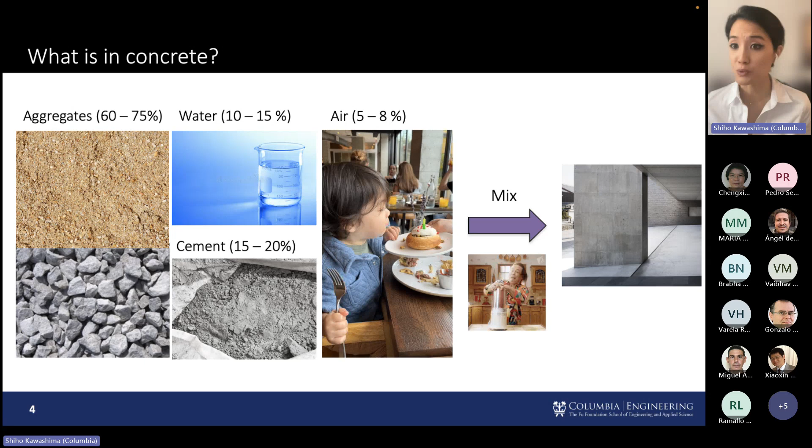But we know that cement is the key ingredient, which combined with water undergoes a chemical reaction, and that really forms a binder that binds all the materials together to create this composite material. And we introduced air for durability purposes, but there's also entrapped air during the mixing process. But by combining all of these ingredients under ambient conditions, we know that we can develop or produce this incredible structural material.

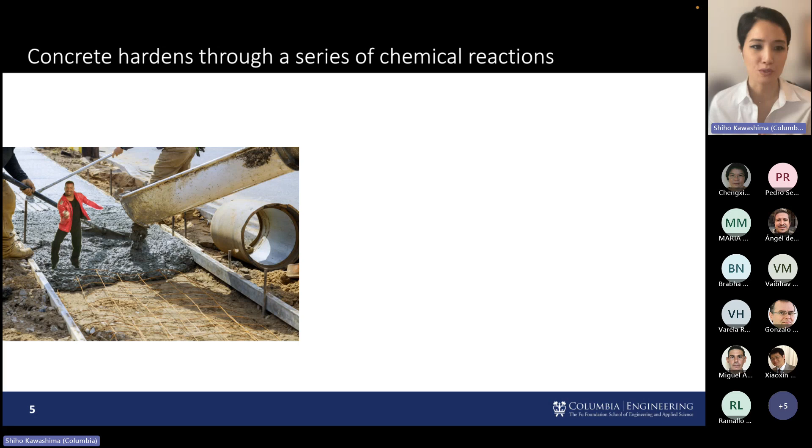And we all know that concrete hardens through a series of reactions. And so as a result of that, it undergoes various phase changes, really incredible, becoming or starting as a fluid, flowable material. So it really moves during construction, but then a few hours, days, and weeks later, it turns into this rock hard material. And this is because of these series of chemical reactions, right?

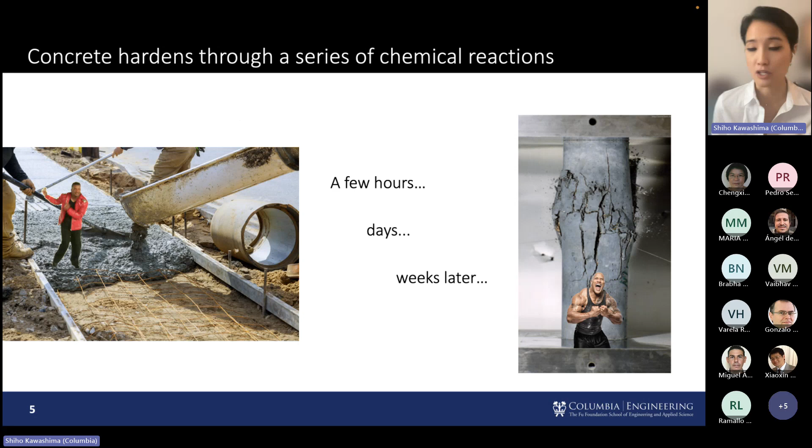And so I think a number of us who are speaking today, and maybe some of you in the audience, you know, concrete is typically thought of while it's in the hardened state, which is of course important, but the fresh state, even though relatively it's a short period of time, is really important because it will determine the eventual performance of the structure in place, but it also will govern how efficiently, how well construction goes. So it really has a significant impact on constructability.

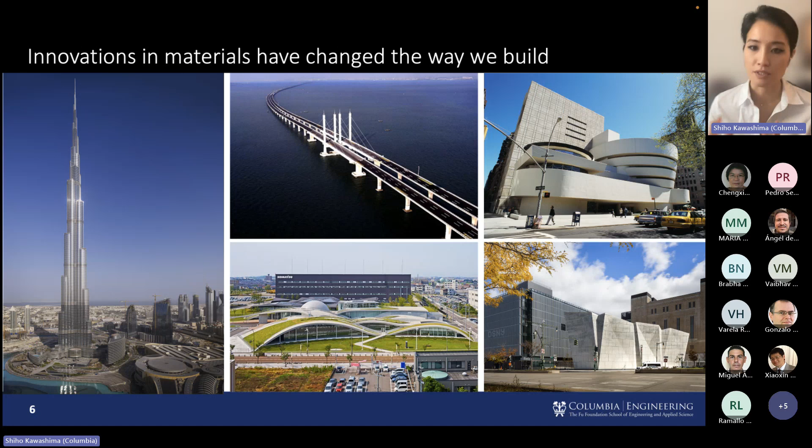And that's really changed the way we build today. So there's been a lot of innovations in material science, in cement-based materials, and that really has a direct impact on construction. And so we've been interested in high performance for a very long time, for a while it's really been focused on stronger and stronger concrete, which is important, and we've made significant progress there. But now we face different challenges, right?

And I think we are all aware of this, but just in case, you know, cement production emits significant CO2. And one of the reasons for this, or the key reason for this, is because we use a carbon-containing raw material. So limestone is one of the key feedstock materials for Portland cement production.

And so we calcine calcium carbonate, right, to obtain calcium oxide, which is the calcium that we want for Portland cement or clinker. And just through the chemistry, there's direct emission of CO2. And of course, the calcination is done because we burn the material, right? And so we burn this massive cement kiln to temperatures of 1450 degrees Celsius. And so, of course, there's thermal emissions associated with this, where we utilize fossil fuels.

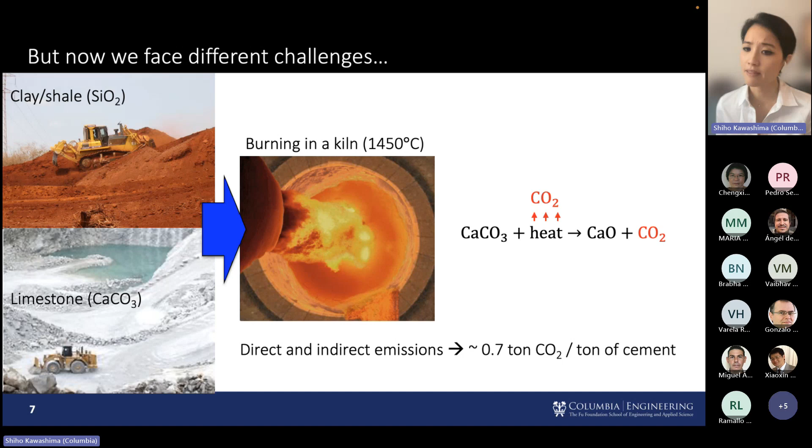So combining the direct and indirect emissions, there's about 0.7 tons of CO2 per ton of cement. And when you compare it to other building materials, that's not that high. Compared to steel, it's not that high.

But when you combine it with just the massive amount of cement and concrete we produce, that's how it all adds up, where concrete is the largest by mass commodity market. We produce over 30 gigatons of concrete per year, and that results in more than 4 gigatons of CO2 per year, where most of that is tied to cement production.

So considering all of that, it results in 6 to 8% of global anthropogenic CO2 emissions being attributed to cement production. And that's not going to go away, right? Concrete is here to stay. The demand isn't going to go down. It's only going to go up due to continued urbanization, the need to repair and build new infrastructure.

And so that's why there's just so much emphasis on how can we decarbonize the sector, how can we adapt more sustainable practices.

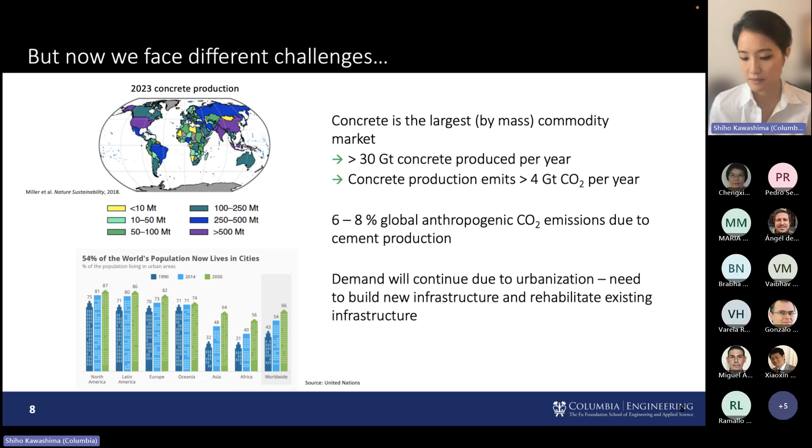So there's multiple pathways to do this, and the most immediate is likely clinker substitution. We already use SCMs and fillers in the industry and practice, and we can keep pushing that limit and maximize the substitution of carbon intensive clinker.

But there are other technology pathways out there. And if we're really serious about decarbonization, then we have to do more than replace clinker. We have to embrace entirely new technologies.

One of them that we've become interested in in recent years is carbon capture, utilization, storage, with a focus on utilization and storage. This is a visual that depicts the potential of CCUS in various industries, and you see circled in blue, we have construction. This can be done through CO2 mineralization to produce construction materials.

Through CO2 mineralization, gaseous CO2, so emissions-based CO2, can be converted to solid carbonates. And those solid carbonates, for example calcium carbonate, can be used as either a cement replacement—we already use that today as limestone filler—or an aggregate replacement, since we already use limestone as aggregate.

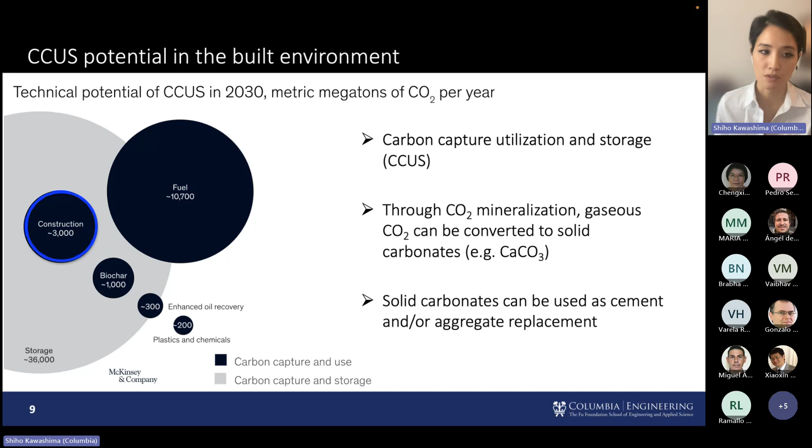So for CO2 mineralization, you need some sort of alkaline feedstock, something to employ the mineralization on. If you look at potential feedstocks, there's calcium or magnesium bearing silicate rocks. We want to stop using limestone, or minimize its use, because if we start off with a carbon containing raw material, it's very difficult to reduce emissions. So folks are looking at other geological materials, including these calcium silicates or magnesium silicates.

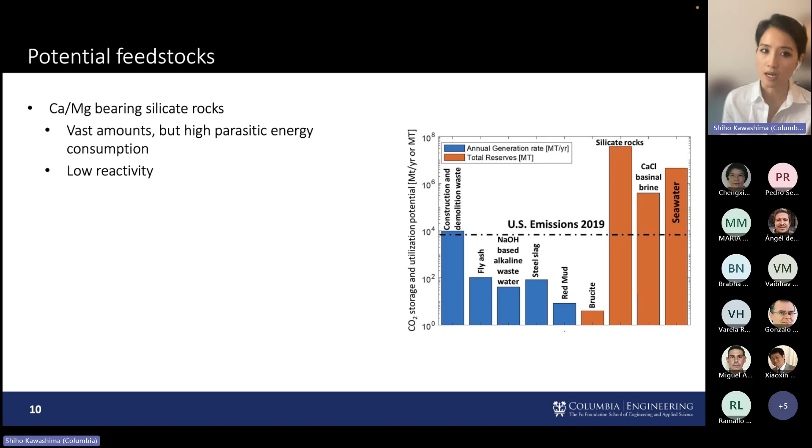They're available in vast amounts, regionally pretty widely available. But there's parasitic energy consumption because these materials, as geological formations, require mining. And also they have a relatively low reactivity, so they would need some kind of mechanical or chemical activation.

On the other hand, alkaline solid wastes are highly reactive. So those are your fly ashes, red mud, construction demolition waste, slags—all industrial wastes—and thermodynamically, it's favorable for them to carbonate. So they're this ideal feedstock from a chemical point of view, but also from a practical standpoint, industrial waste often coexists with industrial CO2 point sources, so there's potential to minimize or eliminate transportation.

People are considering this, and a lot of work has been done relatively on fly ash and slag, but less on waste concrete, specifically the paste phase, and that's what we are working on in our team.

So the advantages of upcycling demolished concrete and employing it into a CO2 mineralization scheme are emissions reduction, waste management, and reduced mining—you don't need to mine for this feedstock material. And importantly, this is just showing all the different feedstocks, because when you're coming up with some kind of alternative solution, you have to make sure there's abundant availability, because our consumption of cement and concrete is so significant.

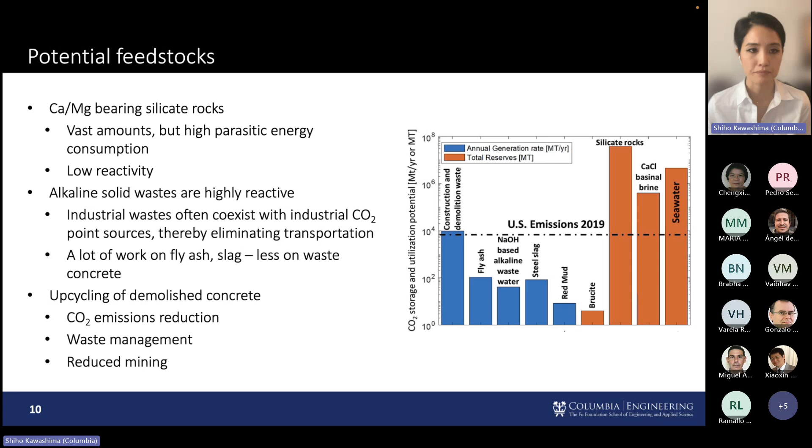So there's industrial waste and CO2 mineralization—you can combine these two concepts, upcycling industrial waste via CO2 mineralization. This is kind of a high level framework.

So you start with industrial waste, rich in calcium, silica, aluminates—all the things we like to see in cementitious materials. And then we can employ CO2 mineralization, which can take on various forms, single versus multi-step. I'm going to show our example, which is multi-step.

Basically, this is where, importantly, CO2 is an input, and you employ carbonation. As a result of this chemical process, you can produce synthetic SCMs and/or fillers. And because of the chemical process, by tuning the parameters, there's this opportunity to tailor the properties of these SCMs and fillers, so it can be quite engineered. Those SCMs and fillers can then be incorporated into concrete production.

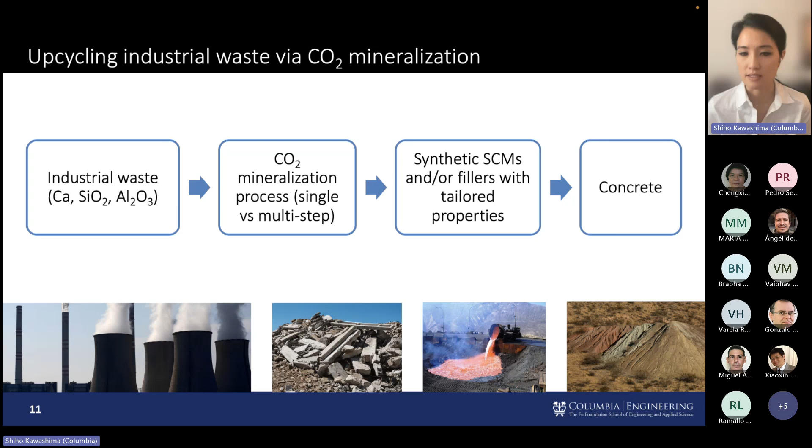So another note, I emphasize that clinker substitution is the direction we have to go in, and that's the more immediate solution we can implement right now. We already do it, and we can maximize it, but some of the SCMs we utilize today, like coal fly ash, are going down in supply because we're reducing our reliance on coal as an energy source, which is good, but it takes away a material we like and are comfortable with. Because of this decrease in supply, there's a need to explore other emerging and novel SCMs and fillers, and I think this work falls into that category.

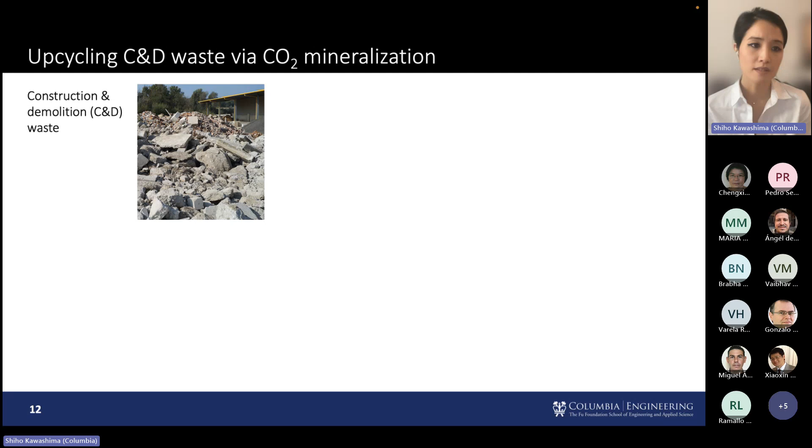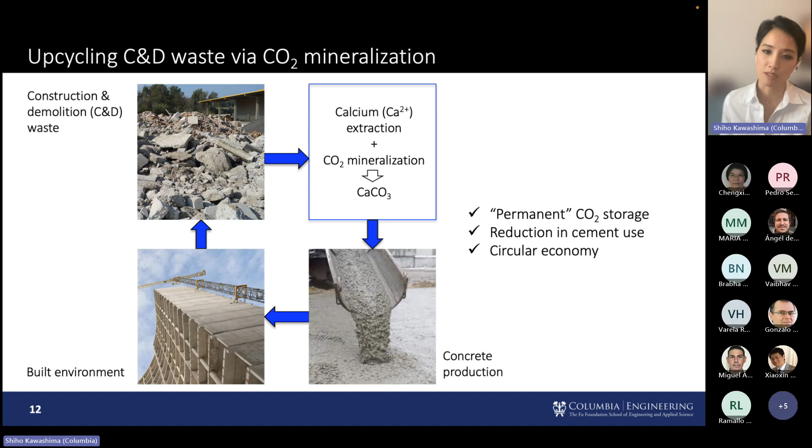In our work, we looked specifically at construction and demolition waste, specifically the paste phase, and we employed extraction and mineralization schemes. A later slide will show this in more detail, but basically we extract the calcium from the recycled cement paste and employ CO2 mineralization to produce calcium carbonate, basically a limestone filler, which can then be used for concrete production, incorporated into the built environment. This framework allows for essentially permanent CO2 storage, reduction in cement use because we're replacing OPC with this limestone filler, and a circular economy.

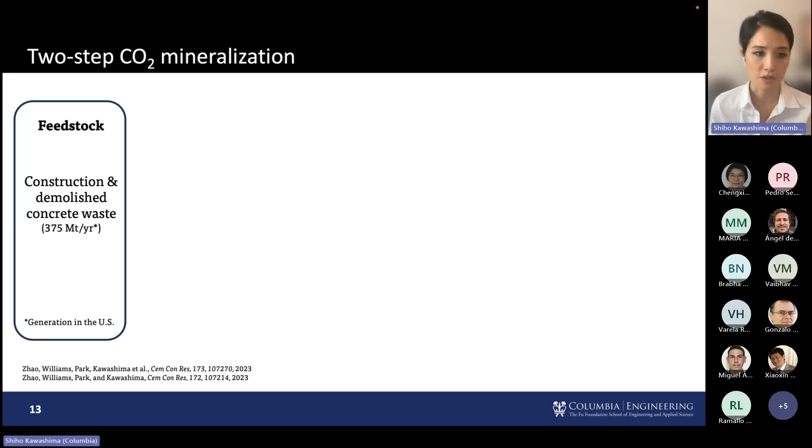In our work, we employed a two-step CO2 mineralization scheme. What does this mean? You start off with your feedstock, which in our case is C&D concrete waste, and then we employ this two-step extraction and carbonation process. Basically, we employ a pH swing: first we introduce an acidic source, which lowers the pH and allows us to extract calcium. Then what's left is this leftover silica-rich residue.

So you should be thinking, okay, that's a source of an SCM. Then you employ this pH swing again, introducing a base, which increases the pH, and from there you can start to remove additional impurities—remaining silica, remaining iron, alumina—and that creates the secondary residue, what we call the precipitate. Volumetrically it's much less than the residue, but it also has some silica, so it's a potential candidate as an SCM. Finally, from this two-step process or pH swing, you've removed most of the impurities and you're left with calcium. Then you apply carbonation and can produce high purity carbonates.

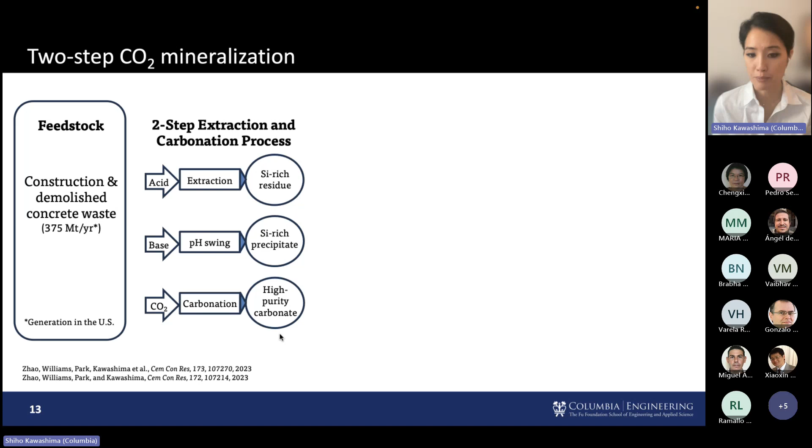So in this two-step extraction and carbonation process, you end up with two products: one is a silica-rich material that can serve as an SCM, and the other is a high purity carbonate, which can serve as a filler. Importantly, by tailoring the parameters of the process, you can produce different polymorphs with very distinct morphologies, which can lead to different functionalities when you introduce it into cement.

So the SCM, the silica-rich residue, we tested it—we tested the precipitate and the residue—and we see it doesn't outperform silica fume, because silica fume is just such a pure form of silica. But we do see there is this pozzolanic reaction where there is an increase in long-term strength gain. And with the high purity carbonates, there are three polymorphs—we'll talk about this in detail, this is just giving you a glimpse. Because of the distinct morphologies, even though they're all calcium carbonate, they affect cement hydration kinetics differently, so there is going to be an impact on the cement-based system.

Just as a note, we focus on the two-step extraction and carbonation process, but there are also direct processes as well, where you just bubble CO2 directly, or the dry method, where you subject your powder to an accelerated CO2 condition and control the relative humidity, relatively high humidity. In that case, you get a single product where the carbonates and the silicate co-produce. So you get this one product, but you still get the carbonate, and you're still left with this pretty reactive pozzolanic material. So one step, you get one product; two step, you get two separate products. It really depends—there are pros and cons in both. Obviously the direct process is much more straightforward, it's one step. But in the two-step, you get these two materials with higher purity.

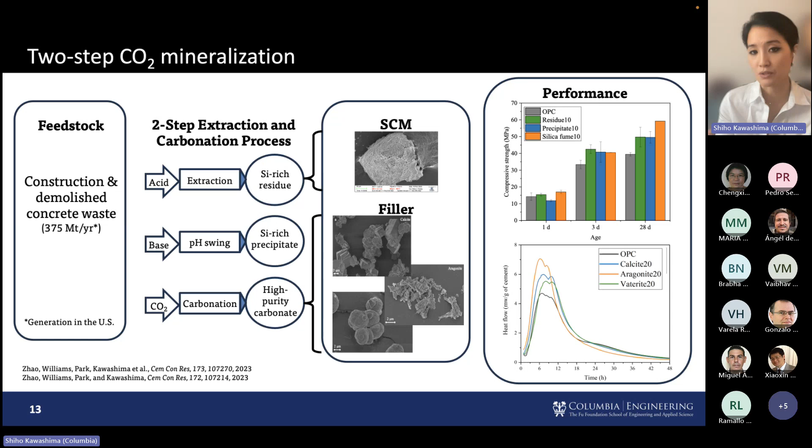Okay, so this is actually looking at what the process looks like. So you start off with this recycled cement paste powder, and then you drive down the pH, and then you extract out your calcium, and then you have this silica-rich residue left over. So that is our candidate SCM.

And then you employ this pH swing where you drive the pH back up, and that's where you extract out your precipitate. And so that's where, again, the remaining impurities are. So silica, alumina, iron, a little calcium gets in there. But then you have a pretty pure calcium system. You apply CO2 bubbling, and you get your calcium carbonate.

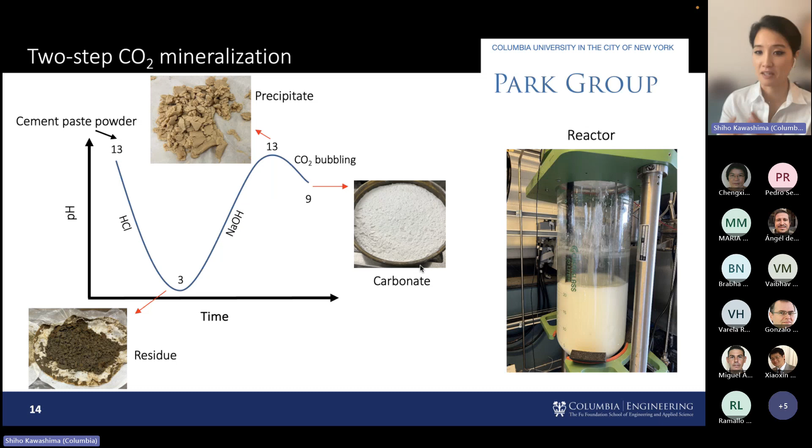So chemistry is pretty amazing, where you start off with this cement paste, this recycled hydrated cement paste, and then you can separate the silica and then obtain this very pure form of calcium carbonate.

So I mentioned that by adjusting the parameters of this process, you can form different polymorphs. So these are all calcium carbonate. And in nature, calcite is what we typically see. So the limestone filler that we use in construction, that's all calcite. And the reason is because that's the most stable form. That's the stable form of calcium carbonate.

But then there's also other forms, metastable forms, vaterite and aragonite, which are rarely seen in nature. I think aragonite is seen very limitedly in nature. Vaterite pretty much not at all, as far as I understand.

But what's cool for us is that through this process we have the opportunity to form these different polymorphs, and they look very different. So calcite is cubic, vaterite is spherical and porous, and aragonite is needle-like.

And given the different morphologies, as expected, you see these very different values in terms of the BET surface area, where aragonite has the highest, vaterite the second highest, because vaterite is porous and aragonite is needle-like, so high specific surface area and high aspect ratio. And then with the particle size distribution as well, in particular, the aragonite has a finer PSD.

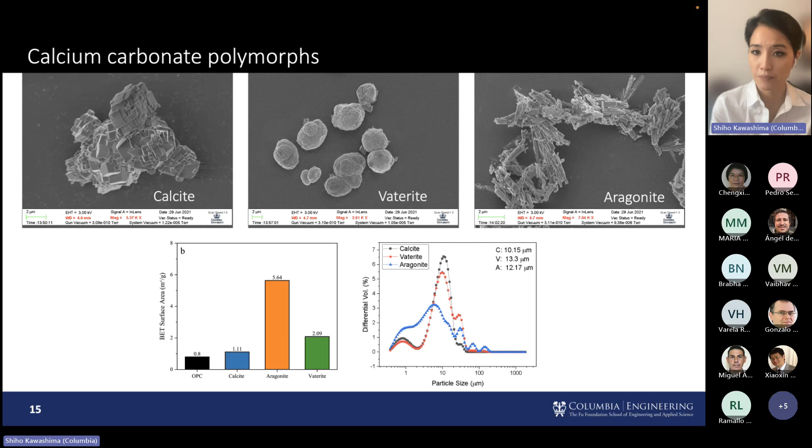So what's exciting is that, again, these materials can start to add functionality. And our work has shown that these metastable polymorphs are actually stable in cement-based systems. So if we want to use vaterite as these porous spheres, they'll remain as porous spheres in the cement-based system. Aragonite will remain as needle-like materials.

So this isn't the main focus of the talk, but just wanted to give you an idea of how these impact very basic properties. So we like to study hydration kinetics. These are all cement paste with 20% replacement of calcite, aragonite, and vaterite - those three different polymorphs. And we see that they all impact cement hydration kinetics differently.

Note that this is all normalized with respect to mass of cement. So we're really focusing on the impact of these materials on cement hydration. And as expected, they all have a filler effect - they all promote nucleation and growth. And so you see the shift and this increase in the peak of these hydration curves.

And aragonite has the highest peak. We can likely attribute that to the increase in specific surface area, where it has more surface area for CSH nucleation to occur.

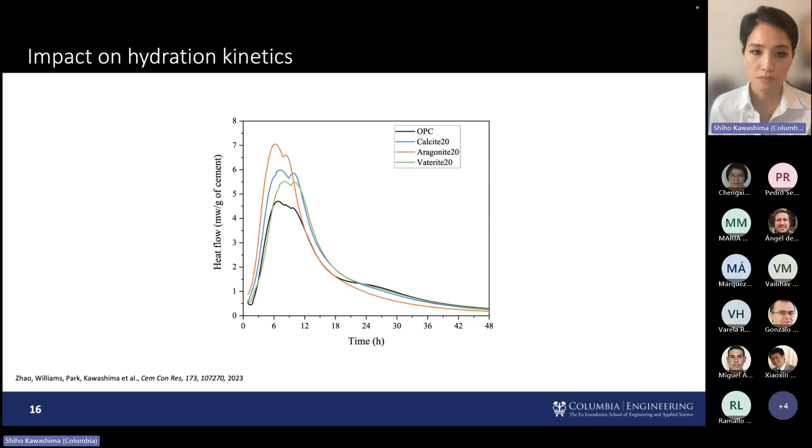I don't include the results here, but we found that calcite actually has the most reactive surface. So although aragonite has higher surface area, calcite has the most reactive surface, and that may be coming into play at longer time periods.

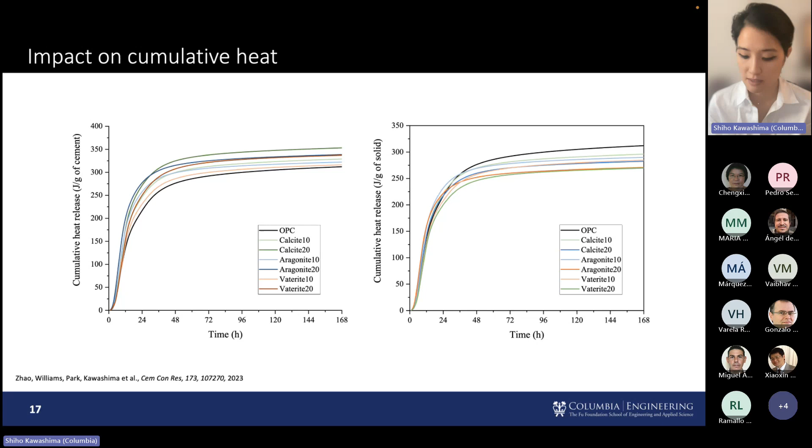There's no real measurable effect, at least by the method we used, which was 1-inch cylinders due to limitations in the material that can be produced. But as a limestone filler, this is an expected trend, so it's not behaving any differently from what we use today.

With PLCs, Portland limestone cements, we know that to achieve comparable strength gain or the target strength, we can apply grinding. PLCs are typically finer than OPCs because the finer the limestone is, the more reactive it can be, contributing to a filler effect. So if needed, we can apply those sorts of principles here as well.

But as is, there's no improvement in the compressive strength—they all perform comparably. But I mentioned that vaterite might be an internal curing agent, and aragonite might have reinforcing effects. We haven't explored that, but we'd be curious to do so if anyone else wanted to.

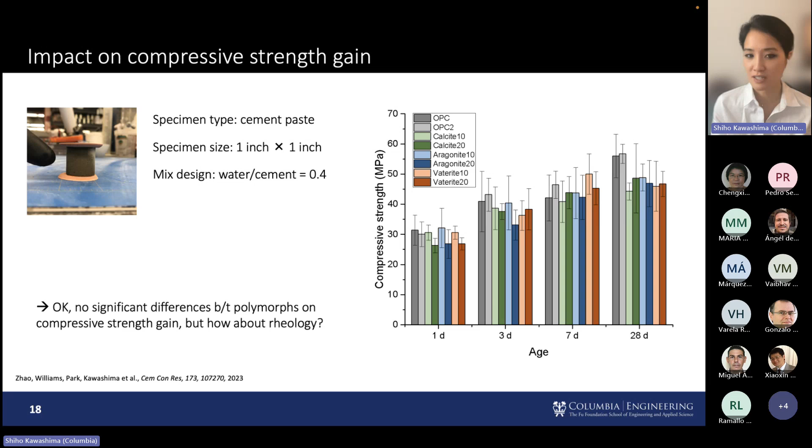But of course, in our group, we're just interested in flow behavior. So we wanted to look at this, since these all look very different and there must be an impact on rheology. That's what we focused on.

So this is our rheological protocol. We focused on the cement paste phase, using a stress controlled rotational rheometer, fixing the water solid ratio, and using a vane geometry. This is our protocol here.

We apply a pre-shear so that we get to some reference state across all samples and all tests. We were interested in the evolution of various properties, including the static yield stress and the dynamic yield stress, so we imposed different rest periods from 0.5 minutes to 30 minutes.

Then we applied an intermediate shear rate—relatively slow—over 600 seconds. When we apply the pre-shear, we looked at the viscosity decay. When we impose the intermediate shear rate, we got this stress evolution. This is kind of a typical depiction of the flow response.

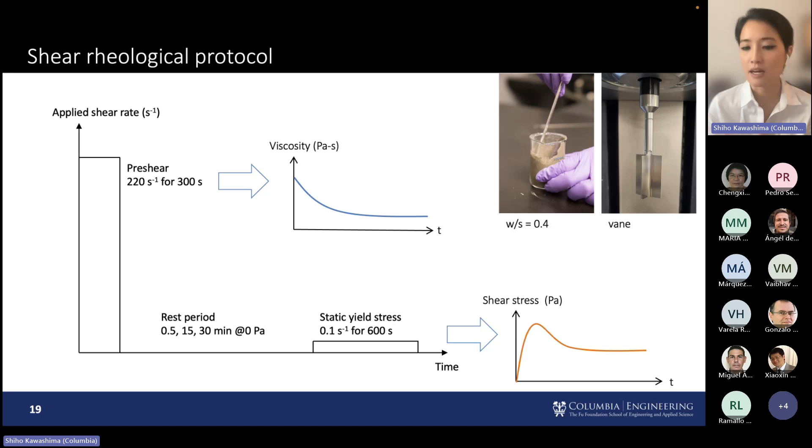So you have this initial elastic component, and then there's this peak, and that indicates flow onset—there's visible deformation of the material, indicating your static yield stress. Then if you continue to shear your material, it eventually reaches a steady state, which can be considered your dynamic yield stress—the minimum stress needed to keep your material in motion.

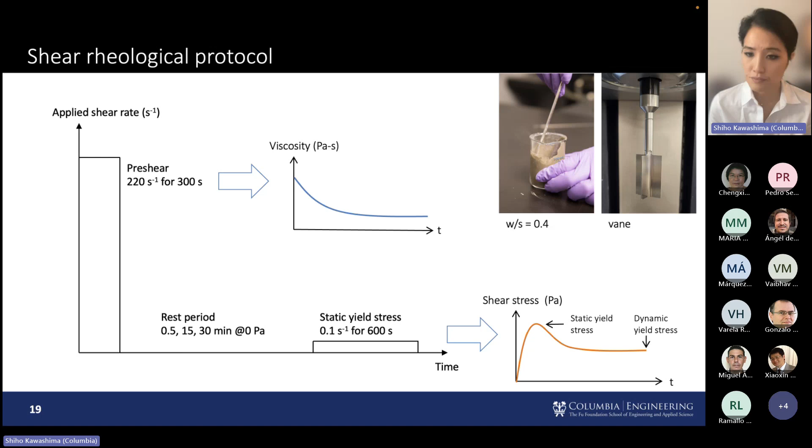We're interested in both of these values. Static yield stress is the stress needed to initiate flow. Dynamic yield stress is the stress needed to terminate flow.

So these are the results—impact on viscosity and static yield stress evolution. This is what we obtained during the pre-shear. Compared to OPC, there's some increase with the vaterite and calcite, but then there's this pronounced increase in the dynamic viscosity when you introduce the aragonite.

To mention, all these materials have the same specific gravity, so we can assume they had the same solid volume fraction. So there's this jump in viscosity.

So we took that peak and measured it over time, including error bars. There's this dramatic difference in the flow response of paste with aragonite addition compared to calcite and vaterite. We're going to talk about why that is.

Just to talk about the actual impact on rheology: it increases viscosity, but it really increases static yield stress and also the rate of increase of static yield stress over time. It seems like Professor Roussel already talked about the thixotropy index, and so did Victor—he referenced it.

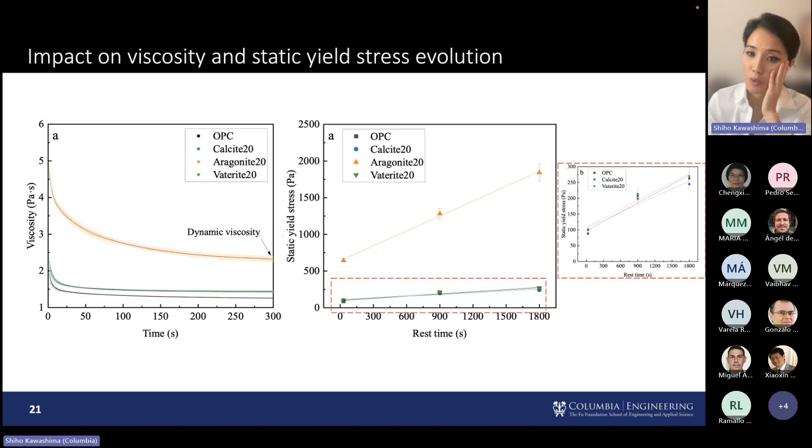We also measured that, and it was an order of magnitude higher. So there's something where the aragonite is impacting the rheology very differently. This is just to focus in on the calcite and vaterite because it gets a little squashed. But really no significant change on static yield stress evolution compared to OPC with no calcium carbonate replacement.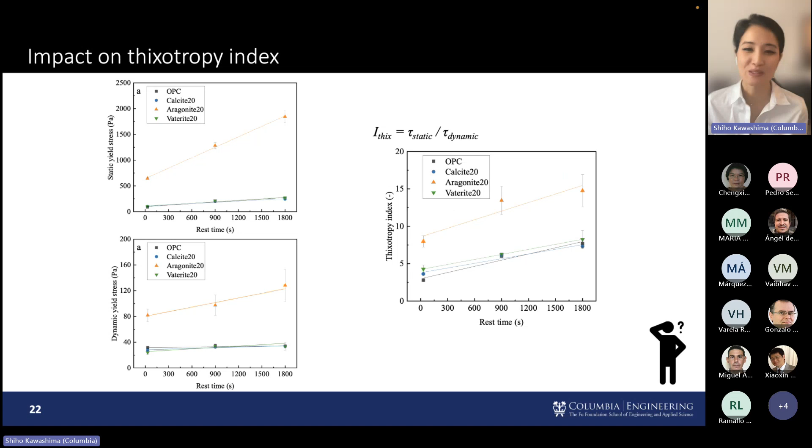The ratio between this can be taken to be a thixotropy index, because the static yield stress gives you a measure of the structural buildup, and the dynamic yield stress gives you a measure of the structural breakdown. Again, we're seeing the same trend: it does increase dynamic yield stress, but relatively, the increase in static yield stress is very, very significant. So aragonite is introducing this very interesting behavior, and we wanted to understand why.

What I'm going to present is we looked at the effect of geometry, and then we also looked at the effect of hydration. So what do we mean by geometry? Here we're focusing on the effect of geometry, and by geometry I mean the particle shape and the particle size distribution. Just remember those SEM images of all the different polymorphs, they're very different, right? In particular, the aragonite is very different.

They're needle-like. To really isolate this effect and remove the effect of hydration -- I'm so sad to have missed Nicolas' talk, but I'm sure Professor Roussel emphasized that the progression of hydration, even though we are in the dormant period or the induction period, will have an impact on your fresh state properties, on rheology. So we want to eliminate that, and we did that by replacing water, which is critical for the hydration reaction, with a nonpolar organic solvent, kerosene.

And also there's no dissociation or dissolution of the cement phases, so that means there's no charging effects either. So we eliminate the effects of hydration, and then we measured static yield stress.

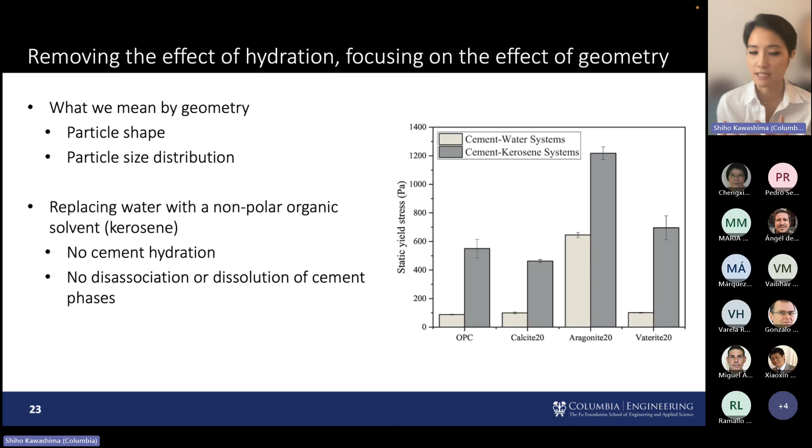Here we're reporting the same measurements from before. The light gray is the cement water systems, the paste. The dark gray are the cement kerosene systems. So what we're seeing is, okay, even without the effect of hydration, aragonite is leading to an increase in static yield stress compared to the other polymorphs, calcite and vaterite. So there's definitely a shape effect, size effect.

The way we sort of visualize this is aragonite, they're needle-like, and because of the increase in specific surface area, they're able to aggregate together. Through that aggregation, on the onset of flow, they can impose this resistance to stress, and that's why it's driving up that static yield stress so much. There's also the impact of higher water demand due to the higher specific surface area. So all tied to shape, right? And because of these shapes, it also interrupts the flow line as well. So that's the reason why static yield stress is higher for aragonite.

But then we also measured that the thixotropy index is very high, right? So relative to static yield stress, the dynamic yield stress is pretty low. And that is because -- and this is found in all sorts of suspensions with needle-like materials -- under flow, these fiber-like or needle-like materials can align in the direction of flow. We suspect that the same thing is happening with the aragonite. With increasing shear duration, more and more of it can break down and align in the direction of flow, which is why we can achieve pretty relatively low viscosity and dynamic yield stress while balancing high static yield stress.

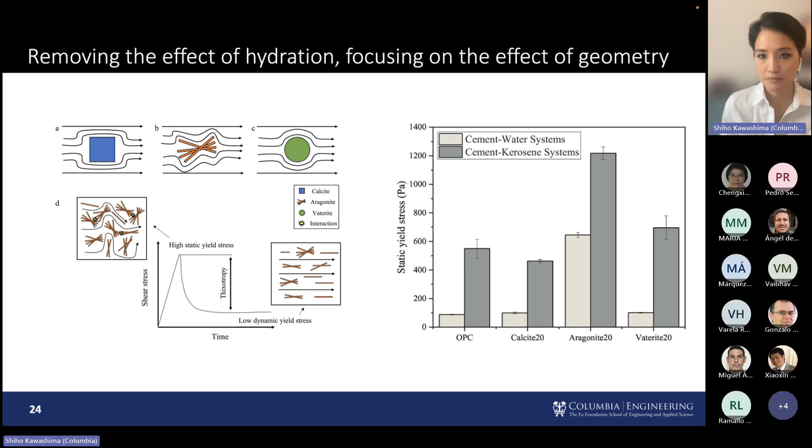So that explains a little bit, but if you look at the values in the cement kerosene system, the static yield stress compared to, let's say, calcite, aragonite was 2 times higher. But if you look at the cement water systems, it was 6 times higher. So this pointed to us that geometry isn't the only factor at play. There's more happening, and of course we looked into the impact of hydration.

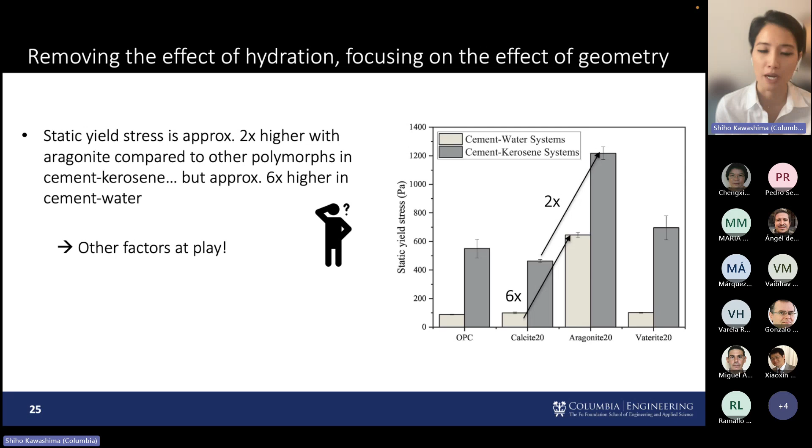Now let's look at the cumulative heat release. These are similar results from before, but now let's really focus in on the time window for the rheological tests. Remember that when we looked at it before, calcite actually - and this is by weight of solid, so that's important, we're looking at the entire solid system, not just normalizing with respect to cement. So this will give us an indication of basically the formation of early hydrates.

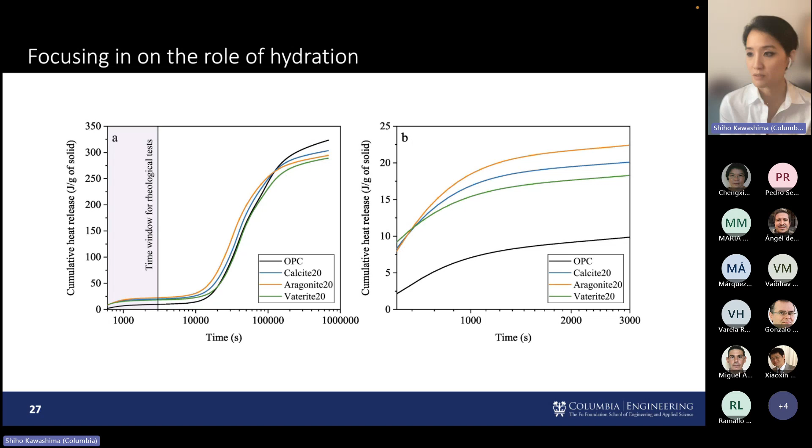I forgot what time I started, but since we're running, this may have been short, but I think maybe that's okay in terms of getting back on schedule. So this is my last slide.

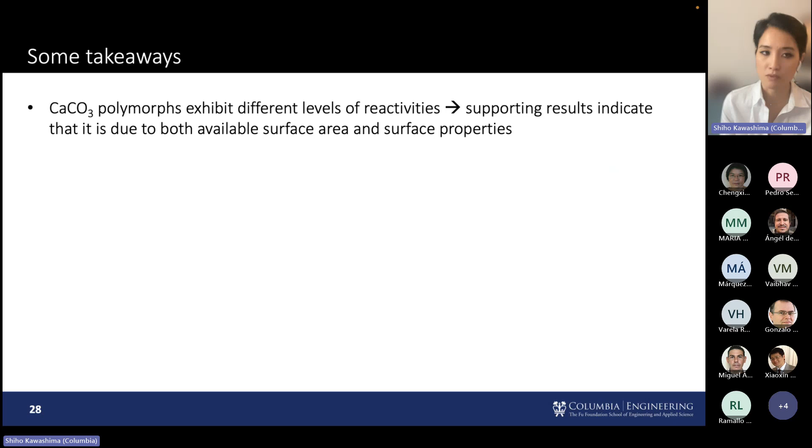Some key takeaways: calcium carbonate polymorphs exhibit different levels of reactivities, and supporting results indicate that it's due to both available surface area and surface properties. All the derived calcium carbonate particles or polymorphs had a similar effect on compressive strength gain, so we didn't really capture any differences there, but it would be really interesting to look at other properties, also scaled up, because scaling matters. We're interested in tensile strength, durability, shrinkage, and other potential functionality, as all these polymorphs look very different and may introduce beneficial properties outside of compressive strength.

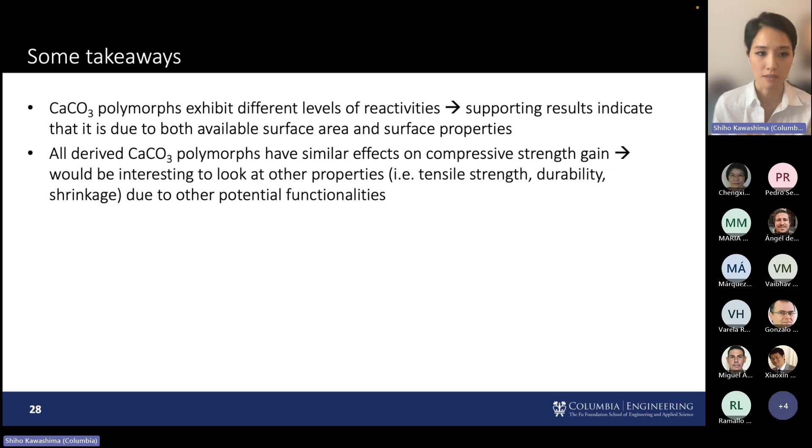Focusing on rheology, aragonite exhibited the higher static yield stress, rate of increase, and thixotropy index compared to calcite and vaterite. We looked at the potential factors, and our results point to it being due to the geometric effect, the needle-like shape - similar effects have been captured with nanoclays, which I've been working on for a long time - and hydration effects, the enhanced filler effect, which results in early hydrate formation.

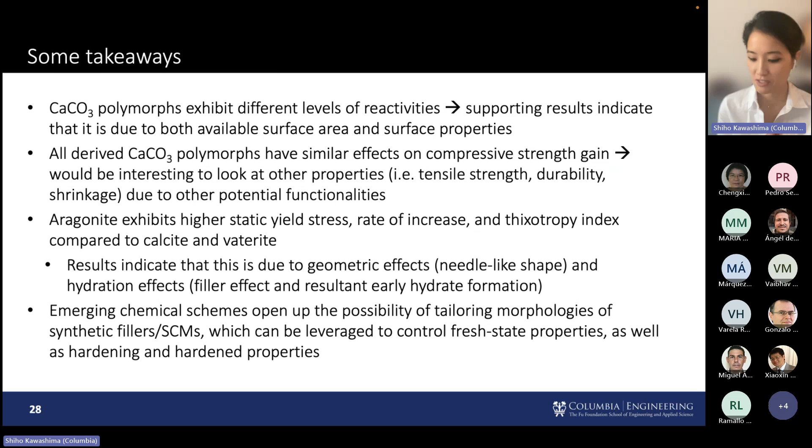This is more of a comment, to maybe inspire some of you. Emerging chemical schemes like the one I pointed to today, CO2 mineralization - and importantly, that is in partnership with a faculty member in chemical engineering, or earth and environmental engineering, who's an expert in these CCUS technologies. So we team up with experts in chemistry because we're okay at cement chemistry, but not chemistry. These emerging chemical schemes from other disciplines open up the possibility of tailoring morphologies of synthetic fillers and SCMs, and those can be leveraged to control fresh state properties as well as hardening and hardened properties. Let's not forget the fresh state properties, because that is important for constructability.

And so the ones who really do all the work: Jonah Williams, he does all the mineralization and extraction work - he's in the Earth and Environmental Engineering department. And Dian Zhao, he's my PhD student in our civil engineering department, and he did all the cement characterization.